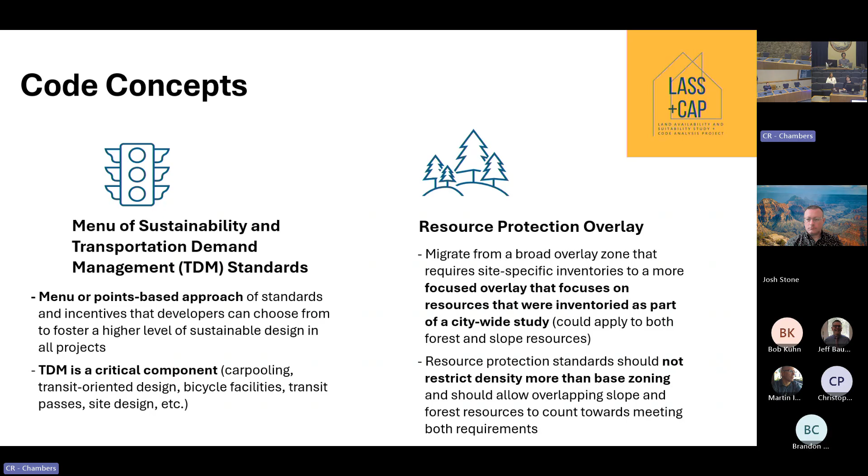Reduce street widths. Again, this is just a concept, but the conversation is, can we have narrower street designs that better serve our community? The diagnostic report found that a reduction of 5 or 7 feet in our street designs can lead to a much larger amount of land for development, leading to better returns for developers compared to wider streets. So how does it reduce costs? But the other benefit, which the Transportation Commission talks about a lot, is how narrow streets calm traffic speeds and can actually be better for safety, balancing all of these things.

Winter parking ordinance and snow removal - this is really about how we manage snow in Flagstaff. We talked about this before, but the diagnostic report showed that Flagstaff is an outlier in terms of our winter parking restrictions, basically the most stringent found in the country. As we think about our snow season, and as we've been talking with our streets team, we now have better information about when storms are coming - really good prediction. So how can we change our winter parking ordinance and snow removal and how those two things work together? Right now, because of our winter parking ordinance, folks can't rely on street parking, which means we have these streets with parking on both sides creating a really big cross section, and you can't park in it overnight or long-term for almost half the year. It's not the best use of space in a place with incredibly limited space and high needs for all of our spaces.

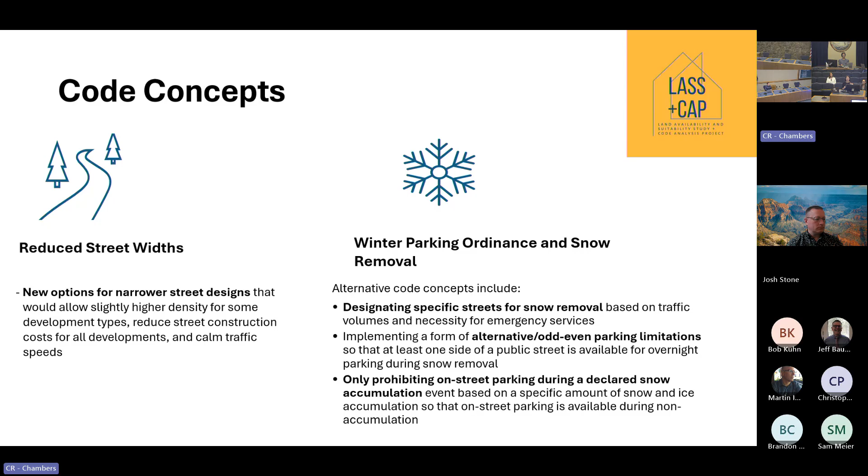There are a couple different elements here: specific streets that might be designated for snow removal during emergencies where you can't park, alternative side or even-odd parking limitations, or prohibiting on-street parking during a snow emergency event. There are a lot of different ways other cities deal with this - we've looked at snowy cities across the US. A lot of cities just let people park for the winter and their car gets plowed in and people dig it out. Flagstaff is certainly an outlier, so the point of this code concept is to really look at the trade-offs with each of those different alternative scenarios.

And I think I'm going back to Tiffany.

Through this pretty quickly - the rest of the core standards and incentives are really all the little pieces of the zoning code: density units per acre, the number of parking spaces we require, and so forth. But really where our consultant took this was to look at whether we should just focus on optimizing our existing incentives, or look at really just going towards market rate and making things by right in the code, or look at how we can offset one thing for another - that's the scenario where we can achieve a lot of different things all at once. So they looked at the different ways we can move components of the code to achieve different sets of outcomes.

The little tweaks that they looked at again were density, our density bonuses, floor area ratio, parking standards, parking standard incentives, as well as our sustainability standards. Today we wanted to not spend so much time on density with you all. If you're curious or interested and want to have more conversation, we'll come back and do this with you.

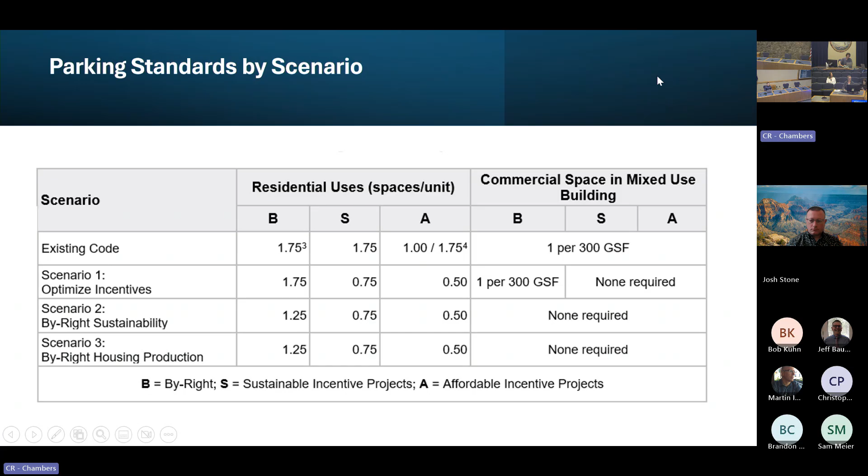But we wanted to talk just briefly about what parking standards could look like. This table looks like it says a lot of things, but it's kind of a gobbledygook table. So let me just take a minute to pull up a document to show you what this looks like. I just wanted to give you examples. Last time I struggled to come up with an example, so today I have them.

By right, or under our existing zoning code right now, if you did a 20-unit apartment complex, everything 2 and 3 bedroom - this is just simplification - you'd be providing about 45 parking spaces for that regular 20-unit apartment complex. If you were to use our affordable housing incentive, we could reduce that by 10 parking spaces to 35. So looking at our code concepts in terms of what we could do to enhance the incentives, a 20-unit under maybe just an affordable housing incentive, you could go down to 15. So starting from 45 all the way back down to 15.

Under sustainability, we're looking at 20, and that's just using the incentive. So at the end, we're getting something out of that. For housing, we're getting affordable housing units. For sustainability, we're getting development that's getting closer to achieving our carbon neutrality goals. And lastly, what we've talked about is just by right, not focusing so hard on the incentives, but what we could do by right. The proposal under that you could see ultimately would get us to 30 spaces. So there's a broad range.

What's good to know about this is that our incentives could still work to our advantage, even if we made reductions by right across the board. We definitely know that parking is one of the most expensive parts of delivering a housing project, especially if it has to come in the form of a parking garage. So wanted to throw that out there.

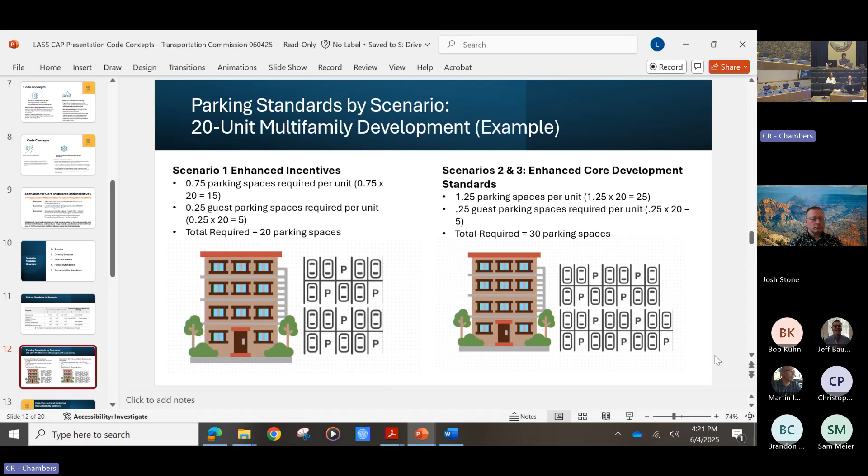I'm going to jump back to the presentation now and just show you really quickly what that could look like - the difference between an incentive versus the by right allowances.

So we are really out and about shopping questions on a couple of decision points. One of the ones we would love for you to think about, and get back to us on - we don't expect it today - is when we look at increasing density, should we be going broad brush across every zone, increasing density, or should there be areas where maybe we're focusing for density? For example, a lot of cities are moving towards putting a lot of residential development in commercial zones and really achieving high density projects in those zones.

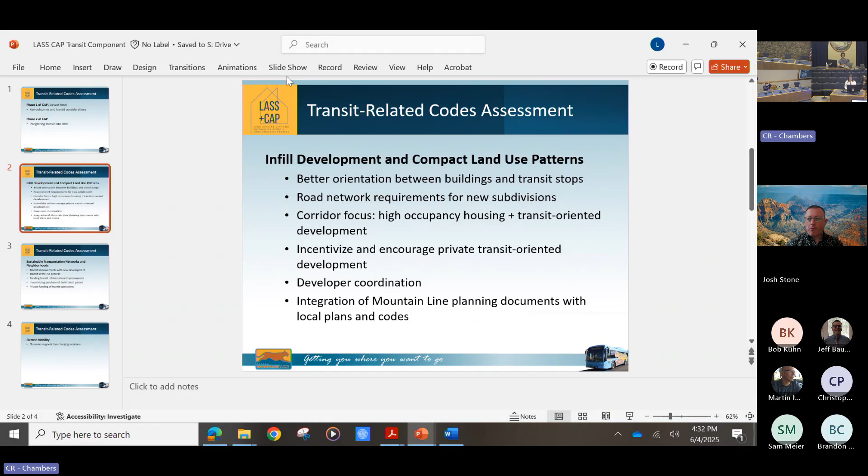Next topic here—we're really trying to get it right from the start, so transit is again the easy choice for citizens to make. The TIA process, the transportation impact analysis, should really have transit considered, so that the impacts assessed include transit. That maybe it's not as much car-oriented improvements, like adding a lane, because transit is already available to that development. Analyzing that, maybe fees will be less for developments, and we can rely on transit as part of the solution, building that in.

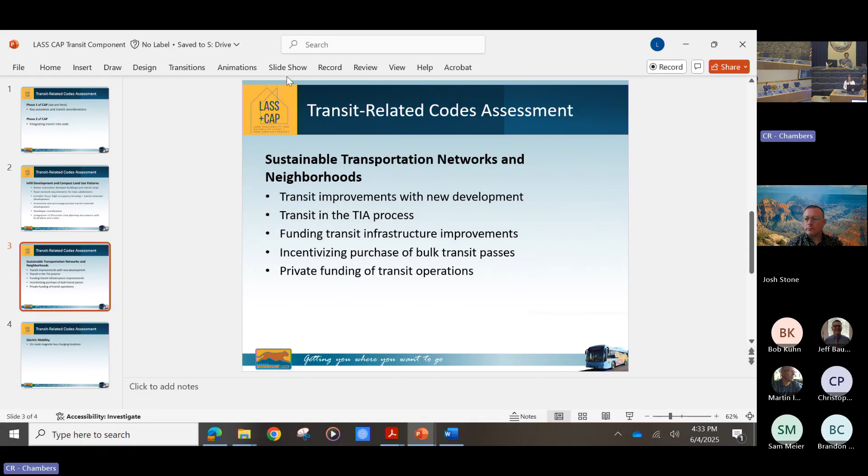Incentivizing bus pass programs with HOAs, employers, et cetera, through the development process puts free bus passes into more hands—again, just making transit the easy choice. Mountain Line is always open to partnerships for private funding of transit operations that are not identified on our 5-year transit plan. For example, Mountain Express that we provide up to Snowbowl every year—that's a private partnership, with Snowbowl funding it at 100%. That's just a great example: if somebody wants transit service somewhere, let's partner, let's come to the table and talk about how we do that.

This is my last slide: electric mobility. Mountain Line is on our zero emission transition, and we will need on-route charging, and we're seeking a clear process to permit that for us. That's all I have, and I think we're going to accept some questions if you have them. Thank you.

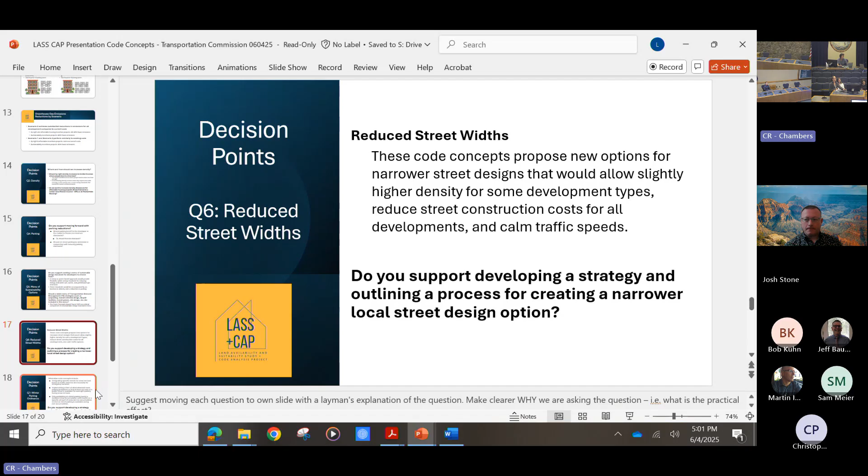And I feel like you guys have already kind of touched on this one, because those two kind of go hand in hand.

Winter ordinance, have we moved on to that? Sorry, I was on question 5, I think, and I was like, wait, we missed the menu option, but that's okay. That was the menu for sustainability. Yeah, so now the question is winter parking ordinance.

I have lived in a lot of cities that do not have any winter parking restrictions, and I think it's never really been a problem. So even if it would be a difficulty to message to the public why it was changing that way, I think it should be taken into consideration. I do think it's easier in places I've lived where they have only park on the odd side of the street during a snow event. That does make it more comfortable and easier to deal with. But I would definitely be in favor of replacing the current winter rules.

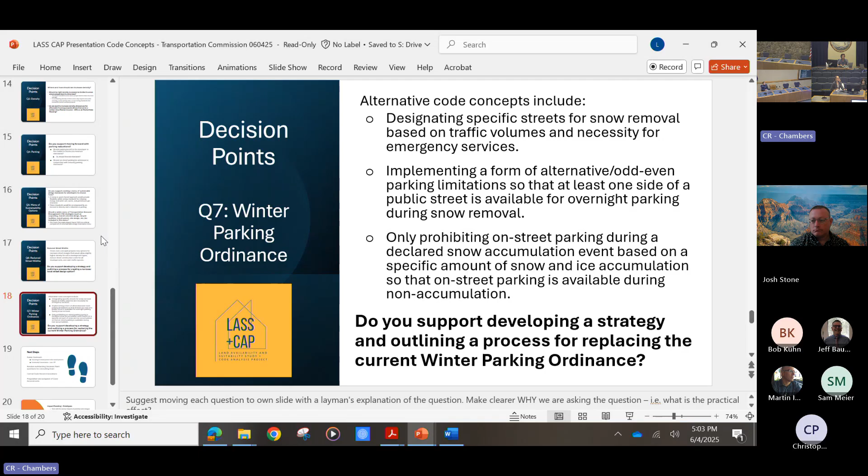I'm sorry, I must have skipped one, didn't I? Yeah, there it is. It's okay, it just confused me. Me too.

I would say increasing the transportation demand management strategies and adding them certainly seems like it'd be helpful. The more of those we can get into the code as requirements, not options, is also helpful.

And I'll add a little to that. You hit it on the point. You got to get transportation closer, and then you can do some of this. But the availability has to be there.

So I had a question, and I am not so involved in the city that I understand how all these things work. We have traffic impact analysis statements required for certain developments, and certain developments seem to be required to put money towards transportation projects. But I also heard that we don't have transportation fees. Is it that transportation fees aren't required for projects that don't require a code change?

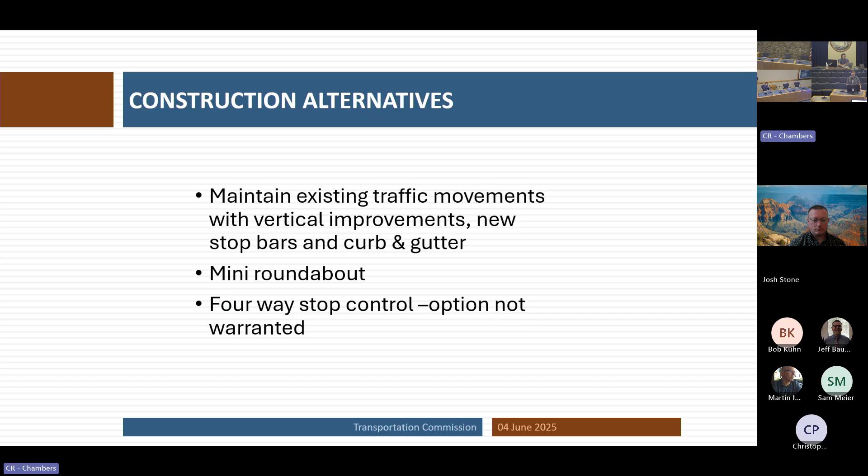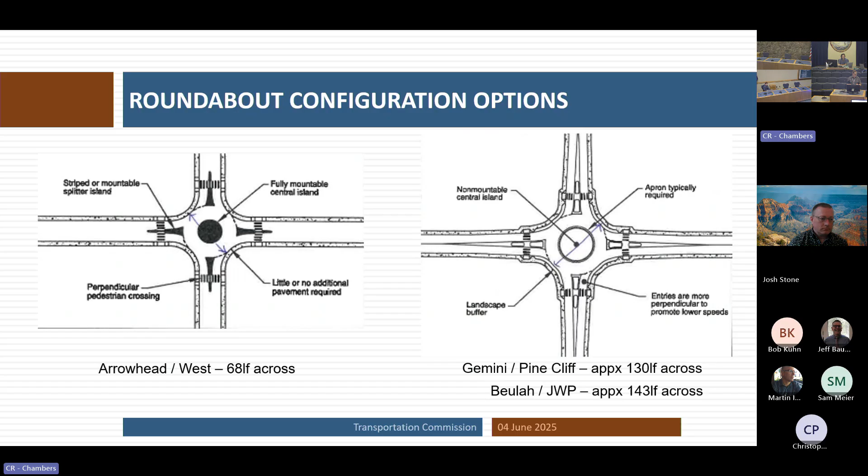Just to give you some context, we have one mini roundabout in town—it's 68 feet across, over at Arrowhead and West. We also have a couple compact roundabouts in town, at Gemini and Pine Cliff, which is 130 feet, and one at Beulah and JWP, which is a little larger at 143 lineal feet. So even though we're calling it a mini roundabout for this initial exercise, the idea is we're not set in stone—there could be something in between a compact and a mini roundabout.

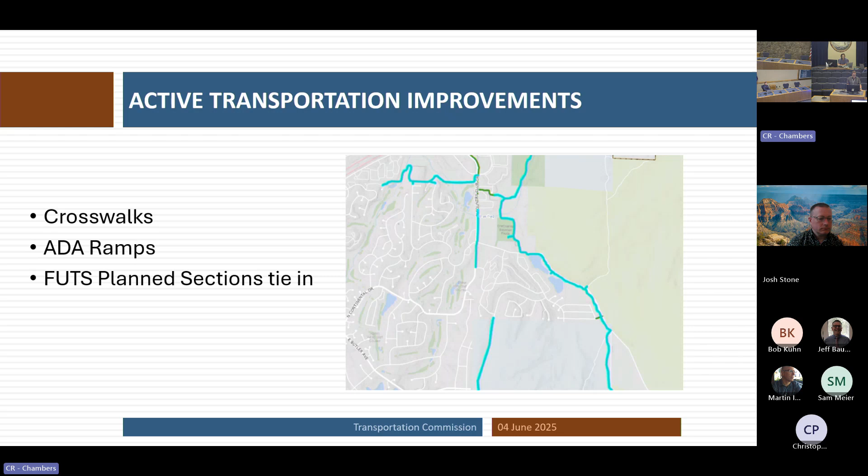As far as active transportation improvements, part of this project, we want to provide connectivity for the future FUTS trail. Right now it goes to FAC and stops, so we want to bring that into our new intersection. The FUTS trail isn't part of this project, but we would stub out at the corners, thinking ahead for things happening there and also in section 20—this area here in tan, in the southeast corner, that's yet to be developed. So we're taking that future section 20 into account as we weigh in on how we design the roundabout for the future.

Just a little more context—again, just an update on where we're at with Country Club and Oakmont. If there's any questions, I'm happy to entertain them. Any questions? Comments? Not hearing any? Thank you so much. Perfect, good—I have a question, sorry.

I just wanted to know what the differences in capacity are depending on the size of the roundabout, like for an hour or whatever period of time.

I'll let Jeff jump in on that. Sure. So as Dave was mentioning, the current volumes at this intersection are not terribly high, not even enough to meet the all-way stop warrant for the intersection.

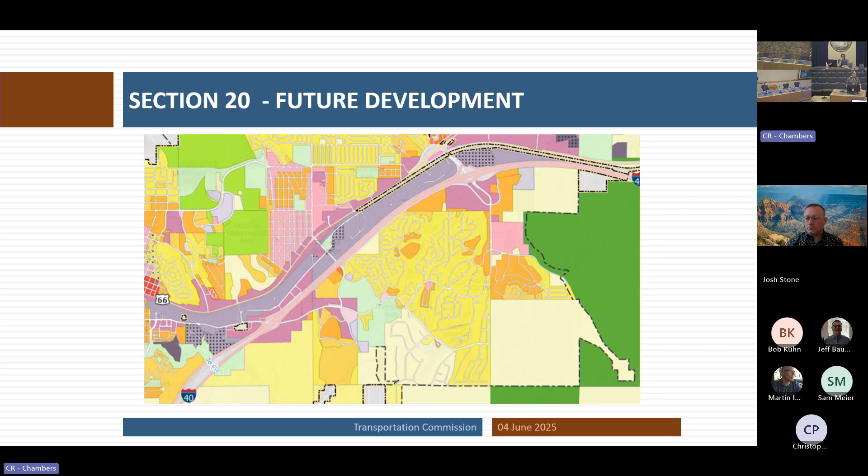But roundabouts, based on how you design them, larger ones tend to have more capacity. Obviously, if you add a right turn lane, that adds quite a bit of capacity. We haven't gotten that far yet. The picture we were showing is really conceptual, but we'll fine tune as we move into real design.

15% design is really just a concept layout — is this the right concept, does it fit within the right of way and the topography of the area? So we're very preliminary, but we do have our eye on that question.

If you're interested in roundabout capacities, I could email that out to the group. There are some fun tables that give you rough capacities, but we're in good shape here long-term with the concepts we've got so far.

Wasn't a direct number answer, which I'd like to give, but I think it gets you there.

Jeff, I like this idea because, being here over the years and hearing the complaints on the speed there too, it'll help with some of the speed issues we've dealt with over the years.

Yeah, for those who've been through, it's very awkward. There's a real sight distance issue to the south. This project cleans that up. We've had a few crashes, none severe, but we've had a few, and it's definitely a challenge to get across this intersection as a pedestrian or biker because you just can't see far enough. Cars can't see far enough, and it's even harder for peds and bikes.

So this is pretty cool. And as Commissioner Kuhn mentions, this is a great transition point where we're going from an arterial road into the neighborhood. Roundabouts are sometimes used just for that function, to try to change the character of the driving experience. So it seems to be aligning and checking a lot of boxes. We're excited to keep moving with this over the next 12 months or so, getting this design rolling.

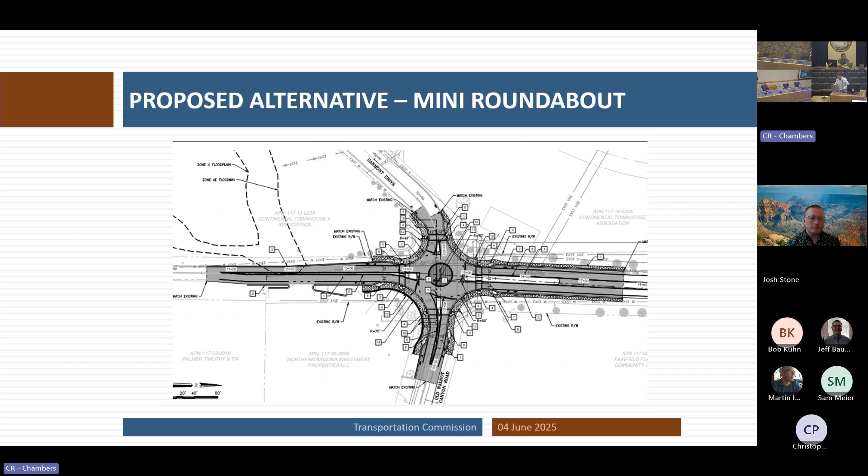As he's going, you'll remember we had a good discussion in April. I think we might have had a discussion in February as well. We're slowly narrowing down the issues on the residential traffic management program. We took your feedback from April, which was fairly finite—just a couple of questions. Dave's met with our attorney's office. He's ready to roll, hopefully with final answers for you tonight.

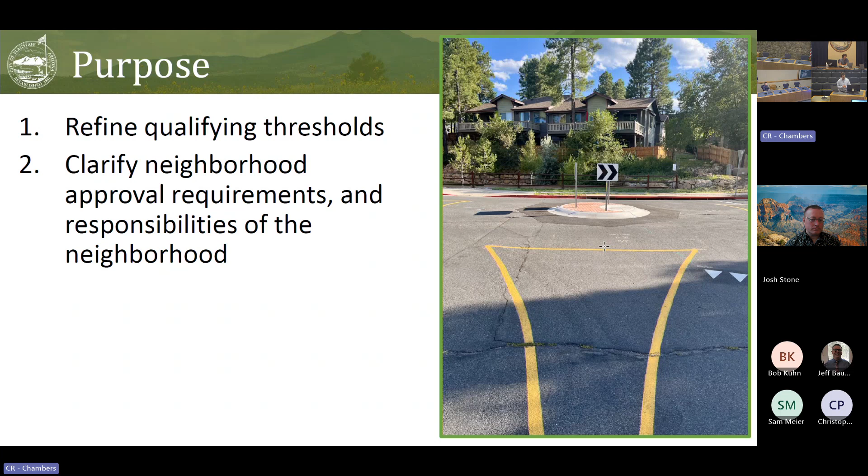Yes, that's the hope. So tonight we're going to go over the Residential Traffic Management Guide update. The purpose is to refine the qualifying thresholds for projects that get into the program and clarify the neighborhood approval requirements. These are things we've seen in the past. The big thing we're trying to address today is neighborhood approval, specifically how it relates to residents versus property owners.

For more context, the new thresholds are simplified. They're based on past studies and focus on areas with the greatest need. We break them into categories for speeding issues, volume, pedestrian crossings, and bicycle facilities.

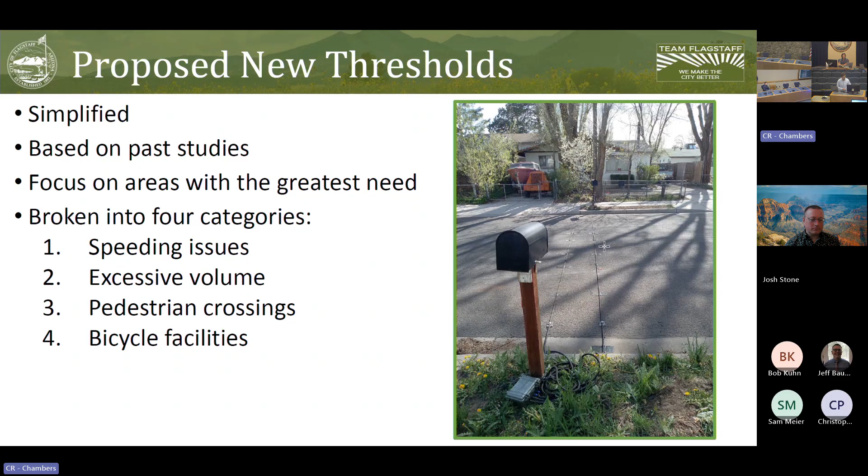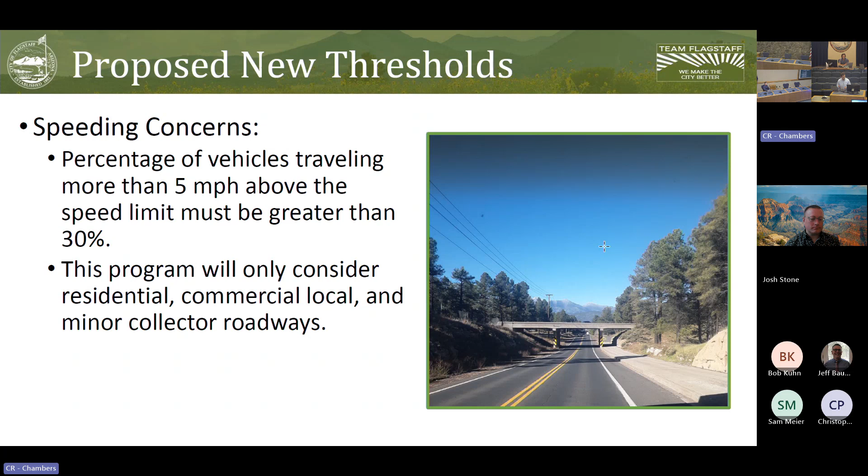Still talking about thresholds, we're changing it for speeding concerns. The percentage of vehicles traveling more than 5 miles per hour above the speed limit must be greater than 30%, and we'll only consider residential, commercial, local, and minor collector roadways. The existing thresholds before were very multifaceted and hard to discern measurable change in a digestible form after improvements were installed.

Now we're getting to the neighborhood approval portion. We still want to have a boundary area determined early by staff, and neighborhood approval is needed to initiate a traffic study in that area. They would need approval from either property owners or residents to get the traffic study going. But to install the traffic calming, we'd still want to keep it limited to property owners, needing 100% of property owners right next to or adjacent to the infrastructure improvement, and 65% of property owners overall in the boundary area.

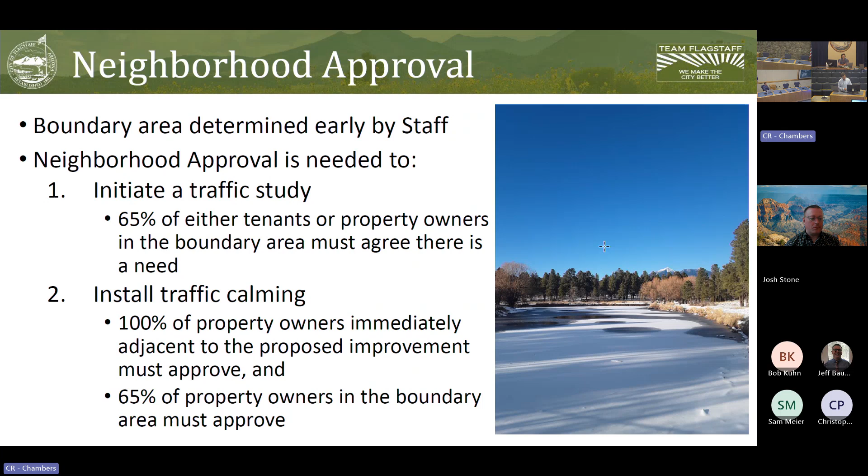Talking to our legal department, they encouraged us to limit it to property owners because it'll have such an impact on the property. Their thought was that if tenants were dissatisfied with the traffic calming, they could ultimately decide to move, but property owners are in a way burdened with the infrastructure and have to deal with it if it takes away parking spaces or similar. But they did acknowledge it is hard to get property owners to respond all the time, especially with these sorts of approval requirements and thresholds.

So they encouraged me to add to the program that if property owners are unresponsive after receiving a certified mail postcard and being contacted by phone, after a period of 2 months the approval will be determined by the responsive property owners. So in our pool, if we ask all these property owners to respond and we only get a certain percentage, that percentage will decide. If they're all yes, we'll apply the same rules: 100% right next to it and 65% overall.

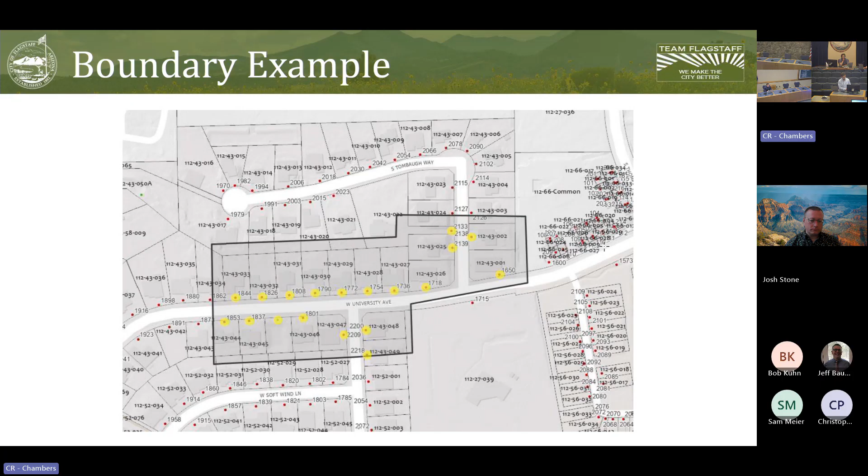This is just a boundary example of how we would choose the boundaries. It's very case specific based on the neighborhood—all neighborhoods are different, especially in Flagstaff—and which neighbors would be most directly impacted. That gets us to our recommendation: we recommend moving forward with the proposed updates for the refined, simplified, measurable thresholds and the clarified neighborhood approval requirements. With that, I'll turn it over to the commission for discussion.

Thank you, Mr. Lemke. Are there any comments by the commission members? David, my understanding then, if you mailed it to 40 and only 5 responded, those 5 get it—there was no minimum number the attorneys required before you can do that, right? Correct. Yes. Thanks, okay.

I have a quick question for clarification. So 65%, what is that here? The neighborhood approval is needed to initiate the study—65% of either tenants or property owners in the boundary area must agree there is a need. So that's 65% of the total properties, one vote from either of those counting toward the 65% total in that boundary area. Correct, yes. We wanted to put that in because we get so many requests for traffic calming—if we fulfilled all of them, we'd constantly be putting our tubes down. It's good to get neighborhood buy-in early, so if there's general consensus that there's speeding or volume issues, it helps prepare things for the process because they're already aware a study is happening, and when we go for neighborhood approval, they're already aware the project's happening, making the process go a lot smoother.